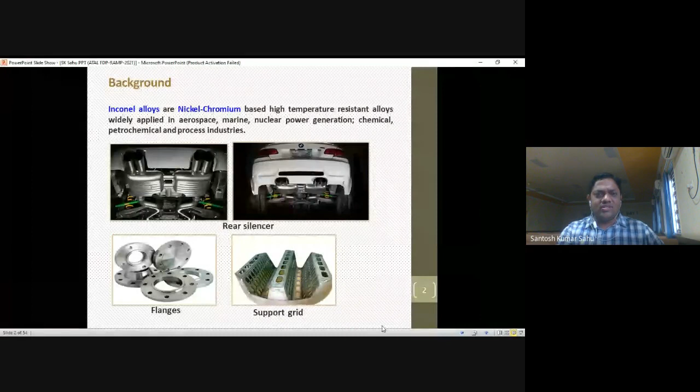First we have to briefly introduce Inconel 718. Generally, Inconel 718 is called a nickel-chromium super based alloy. It has high temperature resistance and is widely applicable in aerospace, marine, nuclear power generation, chemical and petrochemical processes. We also use it in daily life, in the automobile sector, like silencers, flanges, support grids, jet engines, suspension devices, gas turbine blades, diffuser assemblies, and engine ducts — all are basic applications of Inconel 718.

So why do we choose Inconel 718 for the EDM process? Because Inconel 718 is a hard-to-cut material, so it is very difficult to machine using traditional machining processes. That's why we have to use a non-traditional machining process, and based on that, one is our EDM process.

Again, as stated, Inconel 718 is also called a nickel-chromium super based alloy. By viewing Table 1, we can see the chemical composition of Inconel 718. The highest contribution is nickel, with a percentage of 50 to 55%, and chromium is 17 to 21%. Nickel and chromium together carry more than 70 to 75% of the mixture. That's why it is called a nickel-chromium superalloy.

Then we have to see the microstructure of Inconel 718 in the figure — you can see it very clearly. And again, it is very important to understand why we have to go deeper into advances.

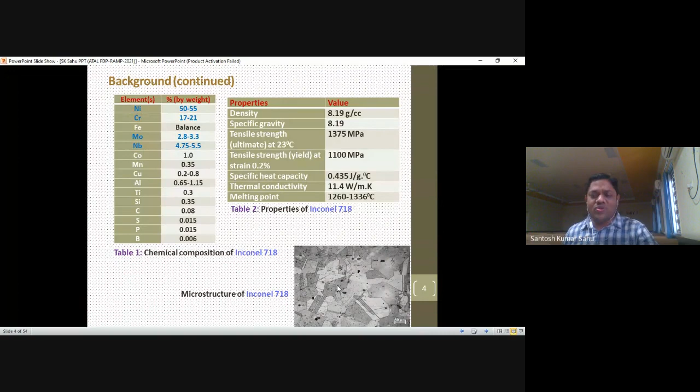In general, you have to know that Inconel superalloy characteristics include very high strength, good oxidation resistance, fatigue and creep resistance at high temperature. That's why it is used in every section here.

But the work hardening tendency of Inconel is the first issue. Second, it has very poor thermal conductivity, already discussed from table number 2. Due to that work hardening tendency and poor thermal conductivity, it results in enormous force while machining and producing a high temperature field. This material exhibits poor machinability, in terms of excessive tool wear and inferior surface finish.

Therefore, Inconel is termed as difficult to cut. Another name of the Inconel is difficult to cut. But as compared to our conventional machining, the machinability of Inconel 718 is improved to some extent if non-traditional machining routes are adopted. That's why we have to use the EDM process.

However, low material removal efficiency and inferior surface finish are the very big disadvantages in any machining area, but especially in EDM. This main limitation of low material removal and inferior surface finish restricts the wide application of EDM for machining Inconel 718 superalloy. So we should eliminate the low material removal rate and inferior surface finish in our traditional EDM. That's why we have to adapt it.

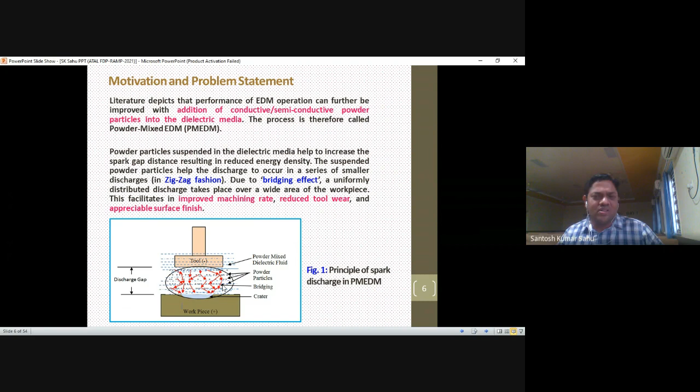These are the limitations in our traditional EDM, normal EDM. That's why we have to eliminate them to some extent by adding some powder into the dielectric. But when you add some material in the dielectric fluid, we do not add it to whatever tank is available in the EDM. That's why you have to especially design a setup. A box we have to design.

In that box we have designed a fixture, we have designed a base, we also have to set a pump, a circulating pump with nozzle, then one stirrer is required, then a metallic tank, it may be glass, whatever. So everything we have to arrange with a separately designed box.

Only then can we do some work in the powder mixed area, because you cannot directly use your normal EDM process; if you add some powder, it can be mixed into the reservoir tank of your EDM oil. Then you cannot change it without the designed setup. That's why it requires a designed setup for changing. We are able to change the powder during the EDM process and see the effect. Also, we use two powders here, then we will see the effect.

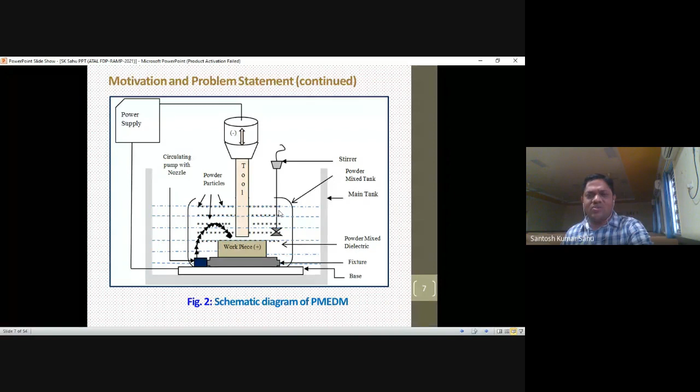Here we take two parts, part one and part two. In part one, we have taken the workpiece as Inconel 718 for the EDM, using graphite powder mixed with our dielectric media. In part one, we use graphite powder. In part two, I will discuss, we use silicon carbide.

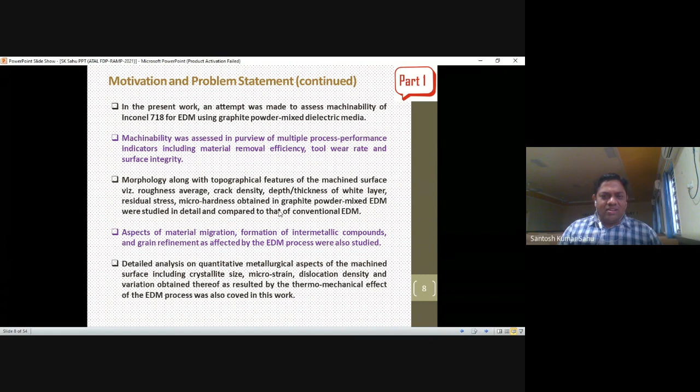So in part one, we also check the machinability. Then we take care of the morphology and topography of the machined surface: roughness, crack density, white layer thickness, residual stress, micro hardness, everything we can discuss. Then aspects like material migration, formation of intermetallic compounds, and grain refinement as affected by the EDM process. Then a detailed analysis of the machining process.

Then again, in the powder mixed experiment in part two, the same things discussed in part one. There we added graphite powder with EDM oil. Next we use silicon carbide powder with kerosene. Here we have taken EDM oil, there kerosene. Here the powder is silicon carbide; before we took graphite. We also design experiments like an L9 orthogonal array with the help of utility theory. We will discuss all those things.

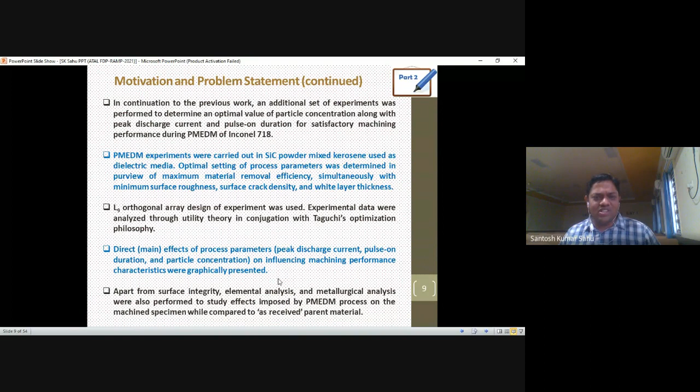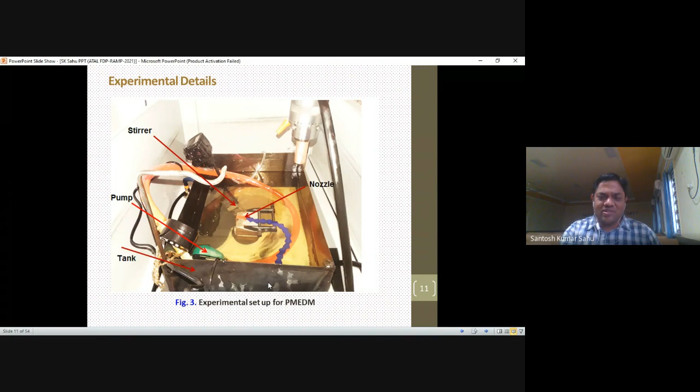Again, why? Because whatever process parameters are available in the EDM area, from the literature review or by trial experiments, we have to conclude that the most influential process parameter is peak current. Then I vary it to see the effect of the variation of peak current from 15, 20, 25, 30 ampere. So here pulse on time, pulse off time, flushing pressure. You should already know all these things; I just highlight them.

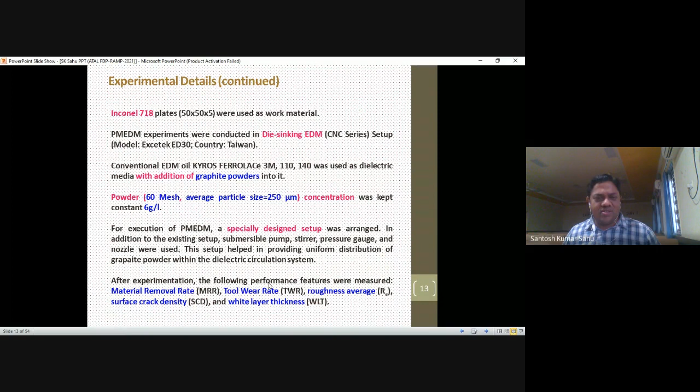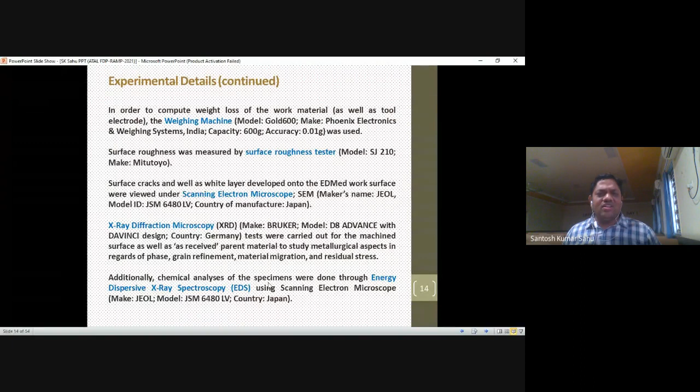So after experimentation, you have to measure the MRR, then tool wear, then surface roughness, surface crack density, then white layer thickness. Then again, a weighing machine is required, then a surface tester is required, then SEM is required, an XRD machine is required, and finally we have tested some EDS. We discuss one by one.

Again, we have to see the surface crack density. It is a very important thing. The surface crack density is total crack length by the micrograph area. From your SEM diagram, using one PDF exchanger, we can measure all that crack density.

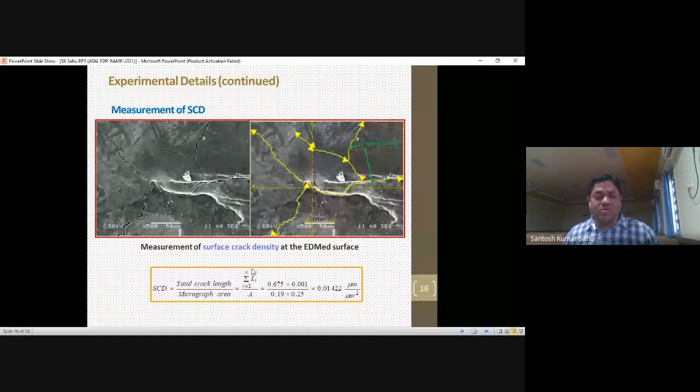So why do you have to measure the crack? Because if you do not minimize the surface crack, it is again one of the limitations of that machining area, because the crack is the initiation of any failure of your metal. So it should be minimized. You have to take care about the surface crack density during the machining.

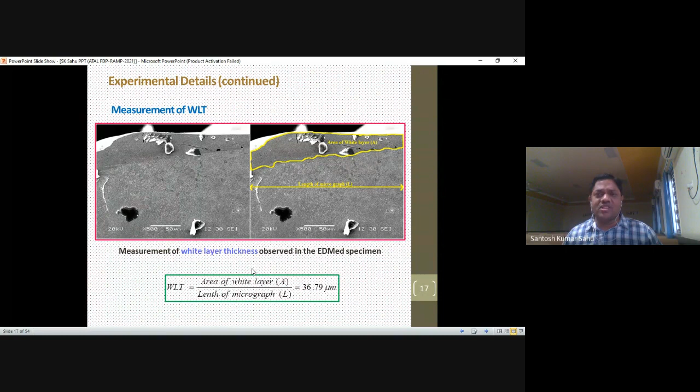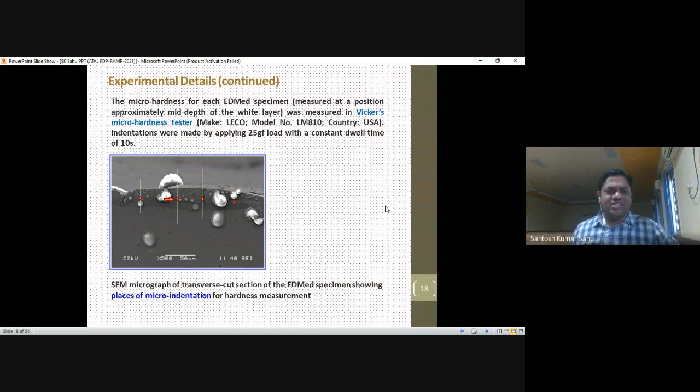Again, we will discuss the white layer thickness: how the white layer thickness is there, the area of white layer that is available, and what is the length of the micrograph. We have to see in the figure. We will discuss one by one. Then we have to see the experimental details in the SEM, and why we have to use the micro hardness tester.

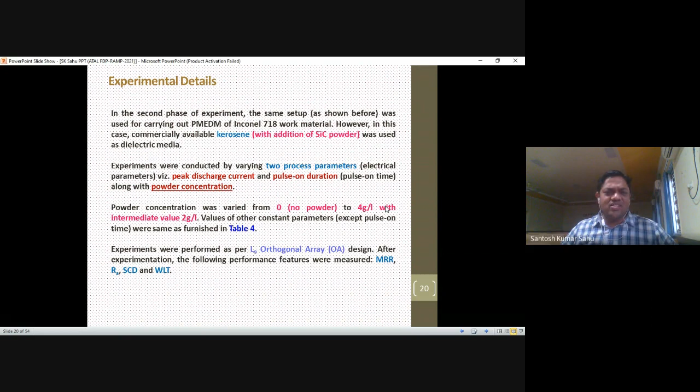Then in part 2, I have taken kerosene and silicon carbide powder. Everything is same, just here we vary the powder concentration: without powder concentration, then 4 gram per liter, then 2 gram per liter. So in part 2, instead of EDM oil, we used kerosene, and instead of graphite, we used silicon carbide powder. We also vary the concentration of the silicon carbide, again with the help of the L9 orthogonal array, and compute the MRR, Ra, surface crack density, all those things.

So in the second part, the process parameters are: IP, which is 25, 30, and 35, then pulse on time, and we vary the powder concentration. Initially we only varied the peak current, and here we vary peak current as well as pulse on time. From the EDM process, the most influential parameter is your peak current, and then pulse on time.

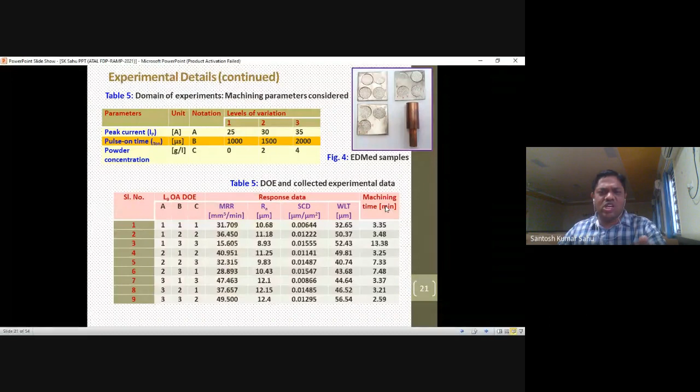So again we have to see the concentration of the powder, and the rest remains constant. According to the DOE, you have to see the MRR, Ra, surface crack density, white layer thickness values. Just concentrate on that.

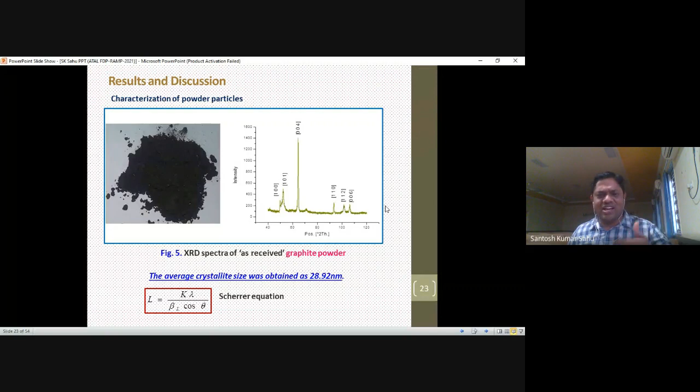Then here K is the shape factor, lambda is your wavelength, and beta is expressed as your broadening, that means your full width at half maximum. It is called FWHM. Then your theta is your Bragg angle. All of you know that equation from physics, Bragg's law and the Scherrer equation. From that it is also directly calculated by the equation we got here.

Then we can see the different magnifications of the graphite powder. But you have to see table number 6. So why do we choose graphite powder? Because here the thermal conductivity is 119 to 165 watt per centimeter Kelvin, and its melting point is 3800 Kelvin. The workpiece we have taken is Inconel 718, and the Inconel 718 thermal conductivity is 11 to 14 watt per meter Kelvin.

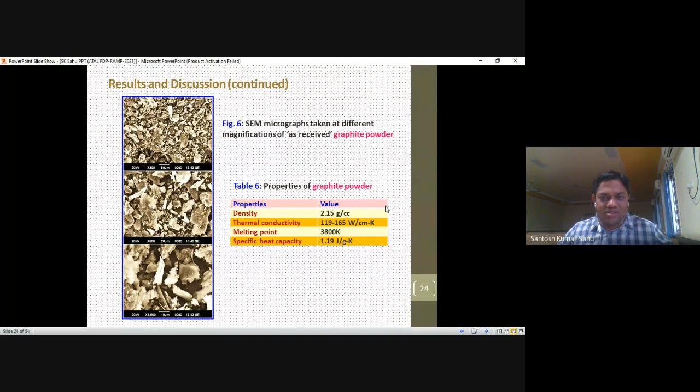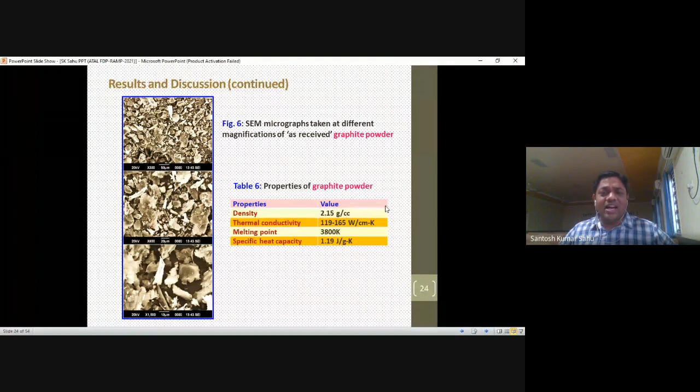Due to that low thermal conductivity, the intensity of the spark from your tool to the workpiece is slightly less. That's why, to utilize the total spark energy from tool towards the workpiece, it should be energized by the help of this graphite powder. If the graphite powder has more thermal conductivity, then the energy is easily carried from the tool to the workpiece within a short time, and we reduce some machining time also by adding the powder, like your graphite powder.

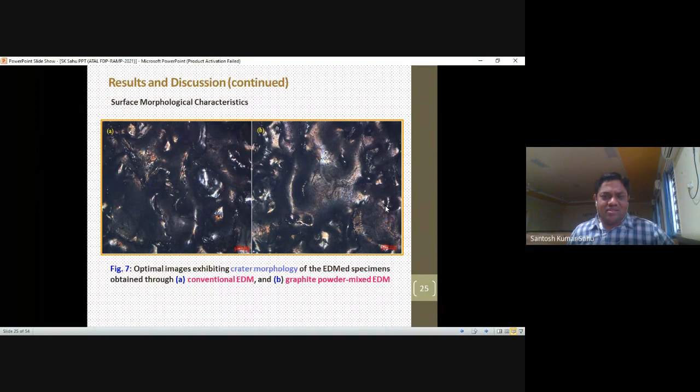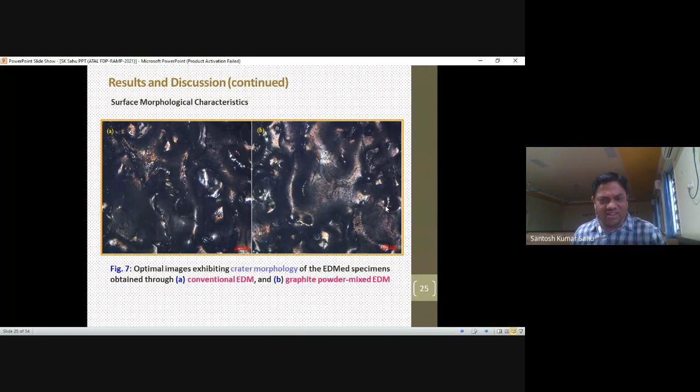Again, from figure number 7, we can see the optical image that exhibits the crater morphology of the EDM specimen obtained. You can see very clearly the conventional EDM in figure A and the graphite powder mixed EDM in figure B. It is not very clear here, but to some extent we can see the surface morphology. The surface integrity we can see very clearly in the SEM figure. The SEM micrograph exhibits the irregularities on the EDM work surface of our material with conventional EDM.

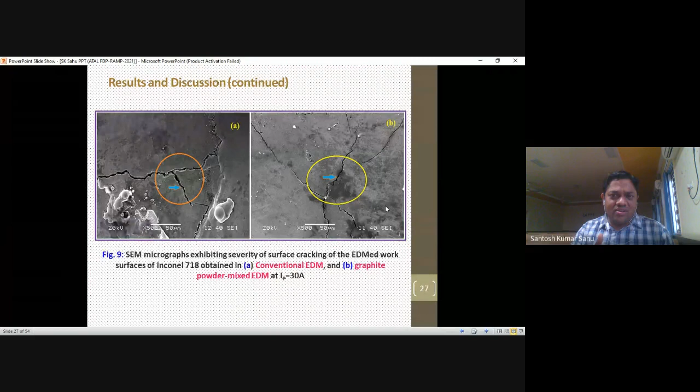And the severity of surface cracking is very important. The severity of surface cracking, that means the crack opening width, was also found relatively high in the case of conventional EDM, as shown in figure A. When we add the graphite powder, we have to know their conductivity, because our material conductivity is very low, only 11 to 14, but here the thermal conductivity is roughly 100 times higher. The graphite powder also carries some amount of heat away from the machined area during machining.

Also you have to know, in traditional and unconventional machining, during machining some temperature develops, and due to the temperature difference the crack will be initiated. So for avoiding the localized increased temperature, the powder particles not only act like the carrier of the spark, they also soak some heat energy from the machined area, and the extent of thermal stresses developed at the machined surface was of relatively less magnitude.

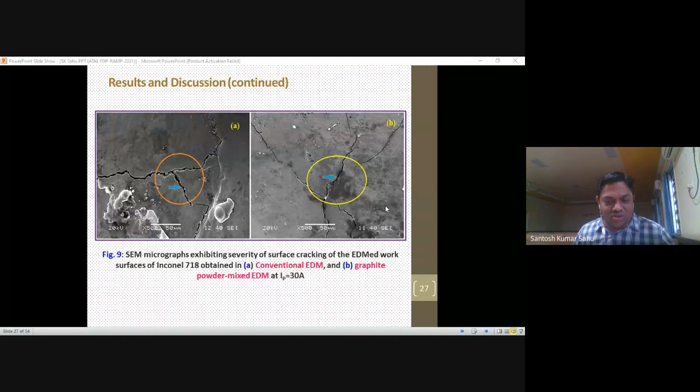Cracks may be there, but the magnitude will be less, and this reduces the degree of severity of surface cracking. So that is another duty of the powder: not only to carry the spark, but also to soak some localized temperature during machining. For that, we can minimize the magnitude of the developed stress, and also minimize the severity of the crack.

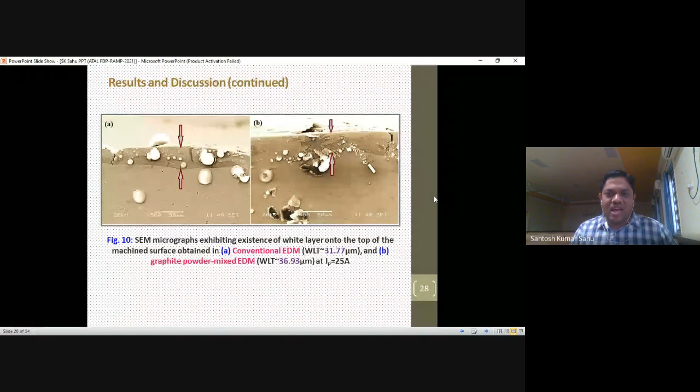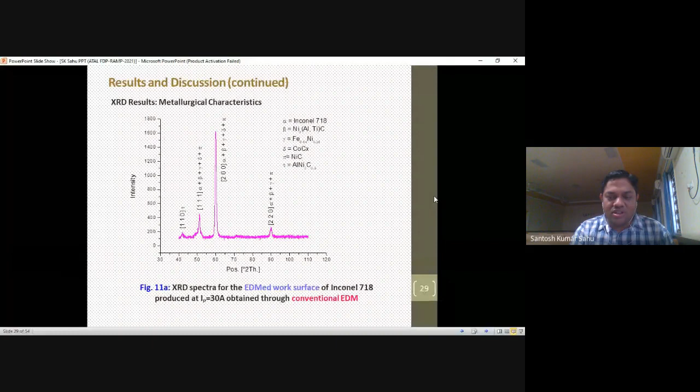So here we can see the peak of your parent material, and here we have to see the XRD spectra of the EDM work surface. One is your as-received work surface, another is your EDM work surface by adding the graphite powder. So while comparing the XRD spectra of the as-received Inconel 718 to the EDM specimen, you have to see the figure.

When you add the graphite powder, EDM machining increases the thermal conductivity of the working medium, that's why you use this graphite powder. It is also possible due to its enlarged spark gap, which results in heat being distributed uniformly into the working zone. Moreover, multiple discharges take place for a longer period of time, and this promotes grain refinement to a large extent, and the refined grain structure also relieves the thermal residual stresses.

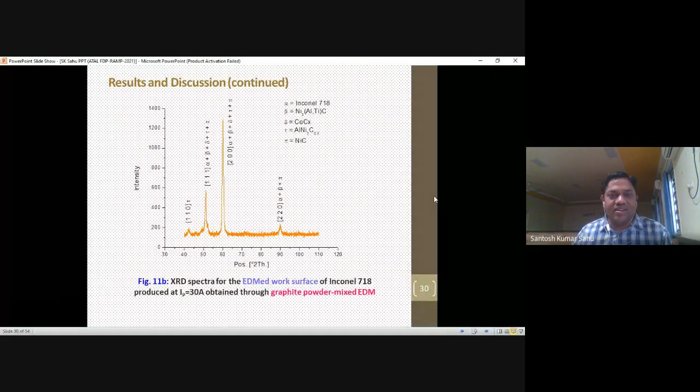Already we have discussed this part. So again, in powder-mixed EDM, some extent of residual stress is also released due to the mechanical abrasion effect of the powder particles on the surface, and therefore the crack formation property is remarkably reduced in powder-mixed EDM, and you get a refined specimen also. We can calculate the crystallite size using the microstrain dislocation theory.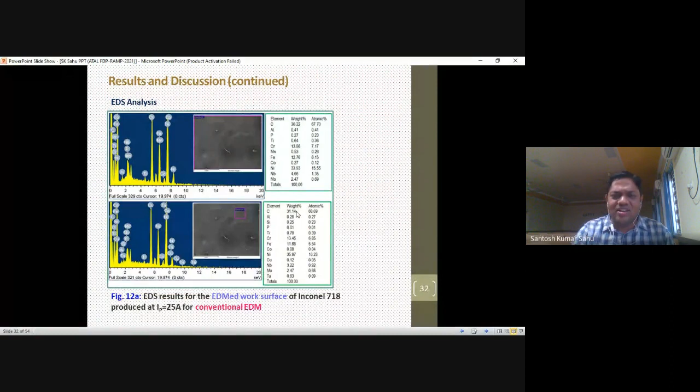By viewing the two graphs in EDS analysis, we can conclude that on the right side you have so many compositions available - carbon, aluminum, and others - and we can see the significance: carbon is significantly very high during powder mixed EDM. From that EDS analysis, it was observed that compared to the as-received Inconel 718, the EDMed work surface obtained through conventional EDM as well as powder mixed EDM both exhibit relatively high carbon content. This is basically a consequence of dielectric cracking, also known as pyrolysis of the dielectric fluid, which promotes carbon migration at the machine surface.

Already during the machining, we have to increase the carbon content, and again during the pyrolysis or due to the dielectric cracking, we have to create some carbon content here. That's why the EDS analysis revealed that the amount of carbon enriched was not uniform throughout the area. That's why carbon content slightly increases, and apart from this localized phenomena, it could also be concluded that the graphite powder mixed EDM resulted in less carbon migration onto the machined surface.

We have to compare this with conventional EDM. This tends to reduce the probability of formation of hard carbide particles at the machined surface, and thus reduces the severity of cracking also. This might be due to the lesser extent of dielectric cracking during the spark discharge, as addition of the conductive powders reduces the dielectric strength of the working medium, thus stimulating earlier discharge to take place. Moreover, the discharge energy was uniformly distributed at the energy zone, which resulted in heat dissipation in a more favorable manner from the discharge zone during the pulse time.

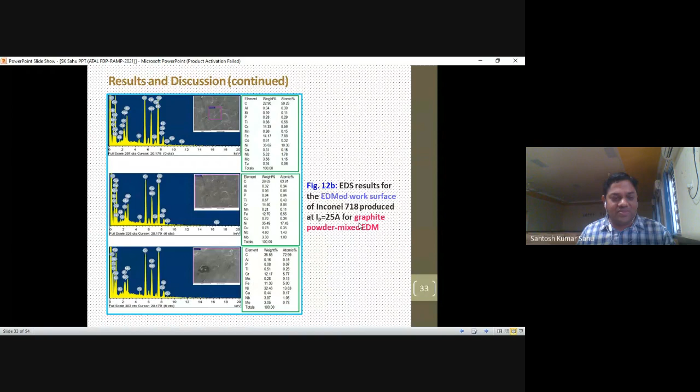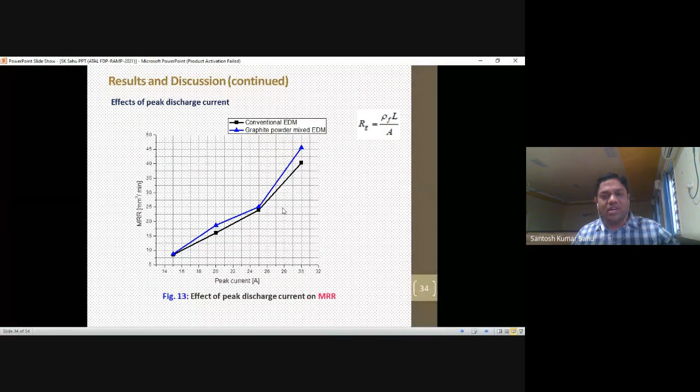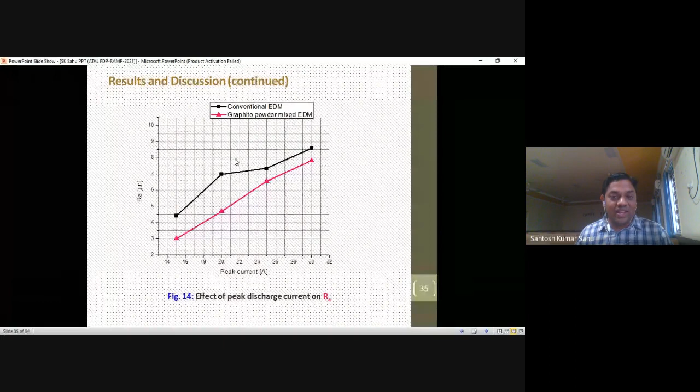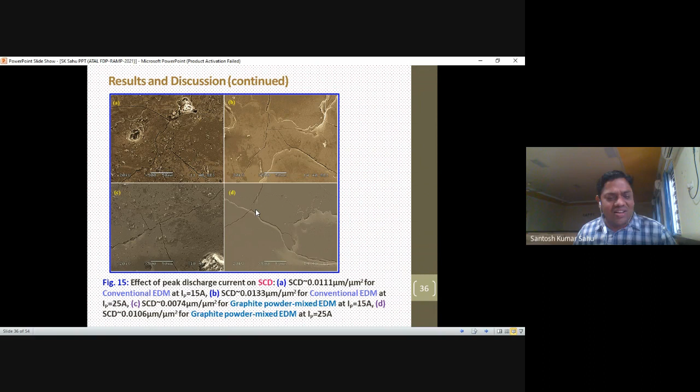Therefore, the transfer of heat by the conductive abrasive particles is balanced by the rapid cooling of your workpiece. Thus, the machined surface produced by powder mixed EDM experiences relatively less thermal stress in comparison to conventional EDM. So, due to reduced residual stresses, there might be a large extent of grain refinement, thereby relieving the residual stresses to some extent. And finally, surface cracking to a lesser extent has contributed to your superior surface finish.

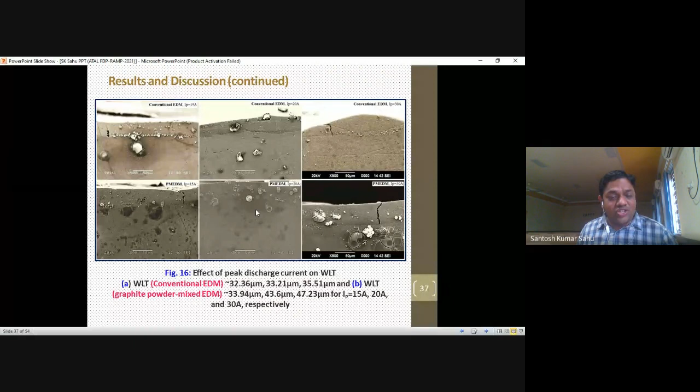During EDM, there is intense heat generation due to the spark discharge, as you already know. Material removal is caused due to the melting and evaporation of the workpiece. However, the spark not only melts the workpiece but also melts the tool. When the intensity increases, it affects our tool also. We have discussed the tool wear rate; the melting of the tool is called electrode wear. Then we have to see the effect of TWR with respect to current.

So we can save our tool by adding graphite powder in our EDM, and whatever tool wear occurs should be smooth. The wear must occur, and it should be minimum, but you have to get smooth wear, so the surface finish will not deteriorate, because in the EDM process the surface of the face of the tool is reflected onto the workpiece, and that should be very clean with a good Ra value on your tool also.

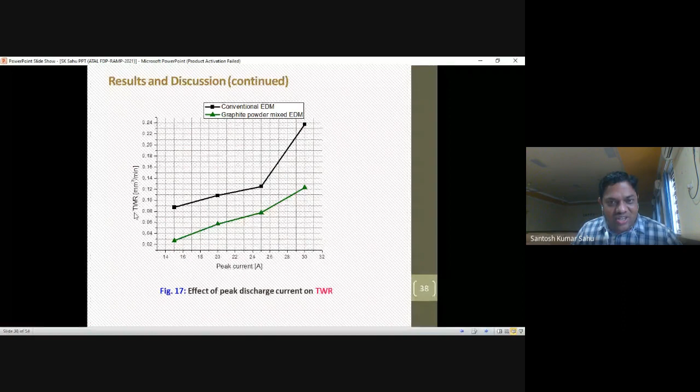Pyrolysis of the dielectric medium generates pyrolytic carbon, which adheres onto the workpiece and also onto the bottom edge of your electrode, your tool. That's why, when you measure the TWR, you should clean the face of your tool before the second machining, because many carbon particles stick onto the tool face.

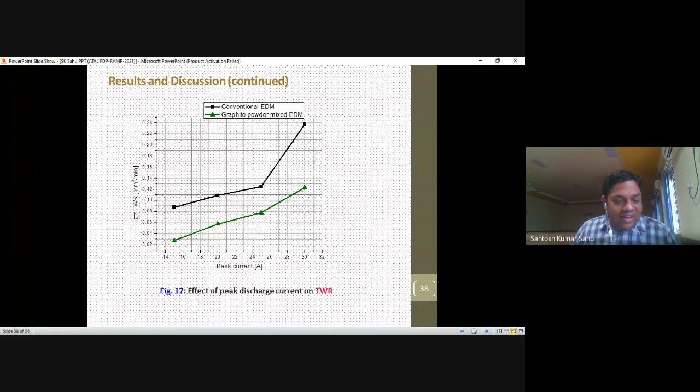And that deposition of the hard carbide layer in turn reduces the thermal conductivity of our tool. So as a consequence, if that restricts the energy of the tool, if it restricts the spark, then the heat generation will be more within the tool, due to not properly transmitting the spark from the tool to the workpiece. Then the tool must be heated.

It will be cleaned properly, then the heat must be transferred from the tool face towards the dielectric or into the powders. So it will be restricted by some local carbide deposited onto the tool face. It should be minimized. So therefore, the heat transfer takes place through the bulk of the material. So that's why, with the help of the powder particles, it should be less as compared to conventional EDM.

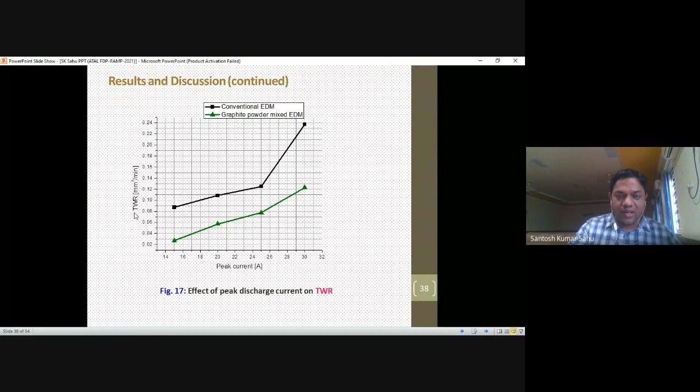Again, we have to see some crystal size. So here we have to conclude part one. We have only discussed the graphite powder, the intensity of the graphite powder. So use of graphite powder of average size 60 mesh, or 250 microns, added to the dielectric media with the powder concentration.

The concentration of 6 grams per liter is found beneficial compared to conventional EDM due to improved MRR, reduced tool wear rate, superior surface finish, and reduced degree of surface cracking. Again, we can conclude that maximum improvement in the MRR was observed at 30 ampere. A more satisfactory surface finish we can get at a current of 20 ampere, and the minimum tool wear we can get when the current is 30 ampere.

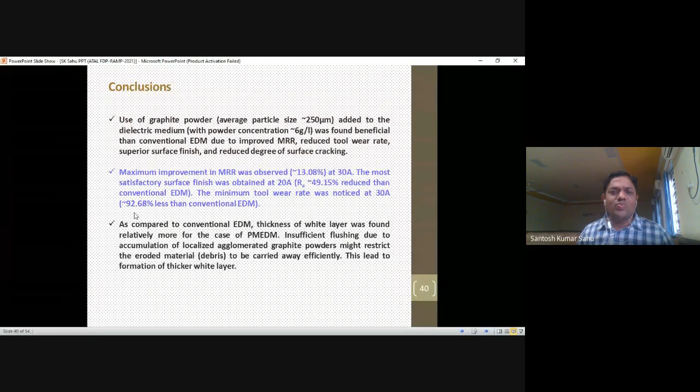As compared to conventional EDM, the thickness of the white layer is found relatively more in the case of powder mixed EDM, due to insufficient flushing due to the localized agglomeration of the graphite powder, which might restrict the eroded material or debris from being carried away efficiently, and this leads to enormous white layer thickness.

And the lesser extent of carbon migration during powder mixed EDM reduces the hard carbide formed on the machined surface, and that consequently suppresses the potential for the formation of severe cracks. This hardness can be minimized by powder mixed EDM, because this causes cracks. Cracking is a major limitation in any manufacturing area, and the specimen produced by powder mixed EDM exhibits relatively less microhardness and residual stress as compared to conventional EDM.

So finally, for the case of graphite powder mixed EDM of Inconel 718, grain refinement to a greater extent was observed at the machined surface compared to conventional EDM. So that is all I have to conclude about the first part. Then next, the second part is there.